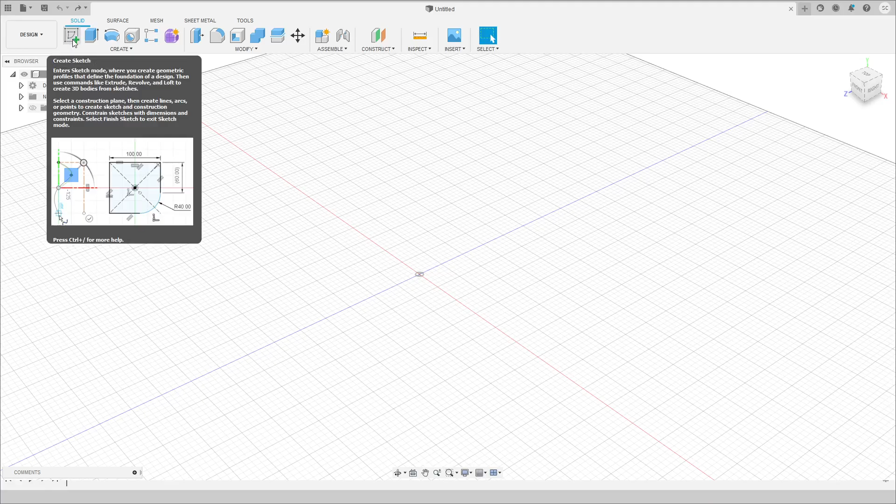So, you may have noticed in the last video, when we were making sketches, the center diameter circle icon up here. And if you press C, it indeed creates a prompt to make a circle. And over here in the feature options, you can select the different type of circle to make. But the one that we're going to use the most, and you can experiment with some of these on your own, is the one where you click to make the center of the circle, and then you drag and enter a number to indicate its diameter.

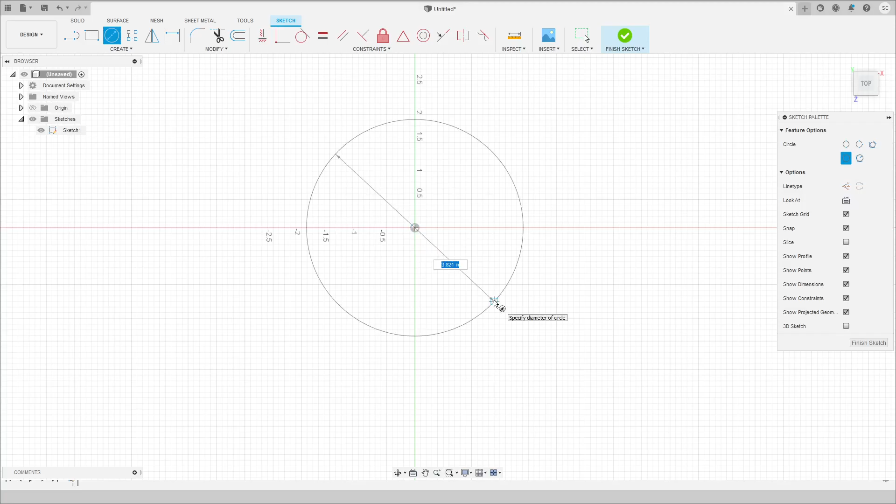So say we make a 3-inch diameter circle, right? Fairly straightforward. Then we can click on this and extrude it. So if we do that, we can make it whatever height we want. And yeah, there we go. I didn't press enter hard enough apparently. And now we have, I guess, like a shortcake looking thing.

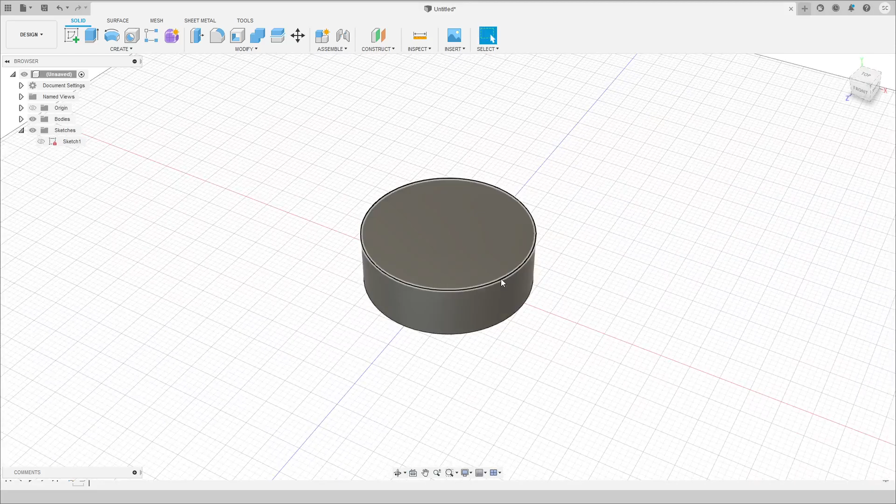Though in reality, I'm not sure what pieces of metal are going to be 3 inches in diameter and 1 inch tall. That's quite a lot of metal, especially in a sort of robotics project, I think. But that is one application of circles that's pretty important. Occasionally, you're going to need circles to make things like this that have flat tops and flat bottoms and round sides.

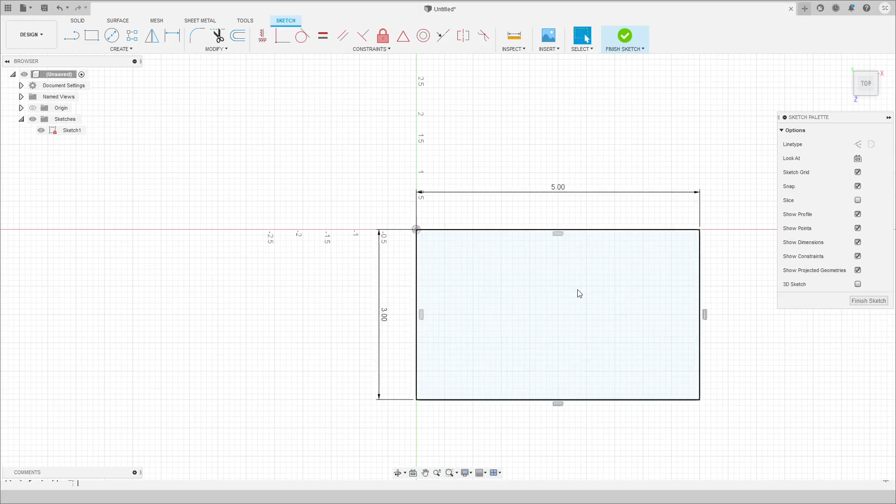But the other application of circles, which is going to be extremely common, especially if you are sketching parts of things, is going to be making basically metal plates with holes in them. So say we extrude this by 0.125 inches. I'm pretty sure that's a standard thickness for plates of metal that you can get. It might be slightly thinner, but not super relevant to demonstrating this idea.

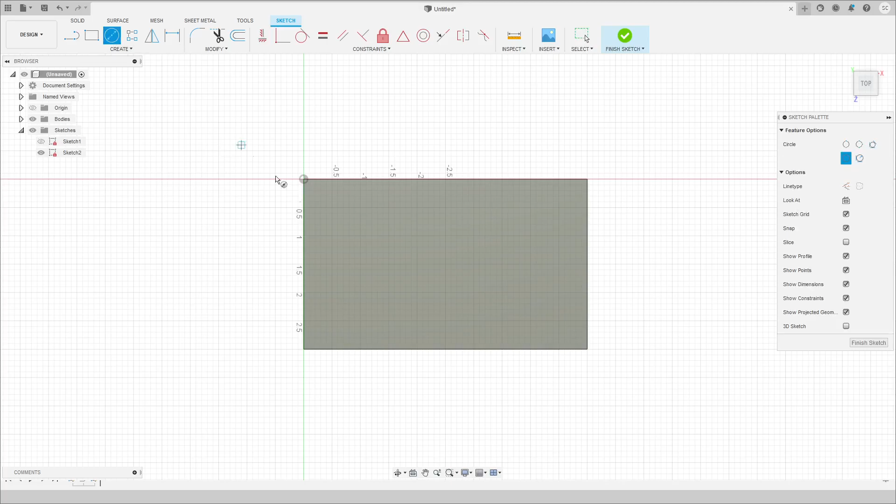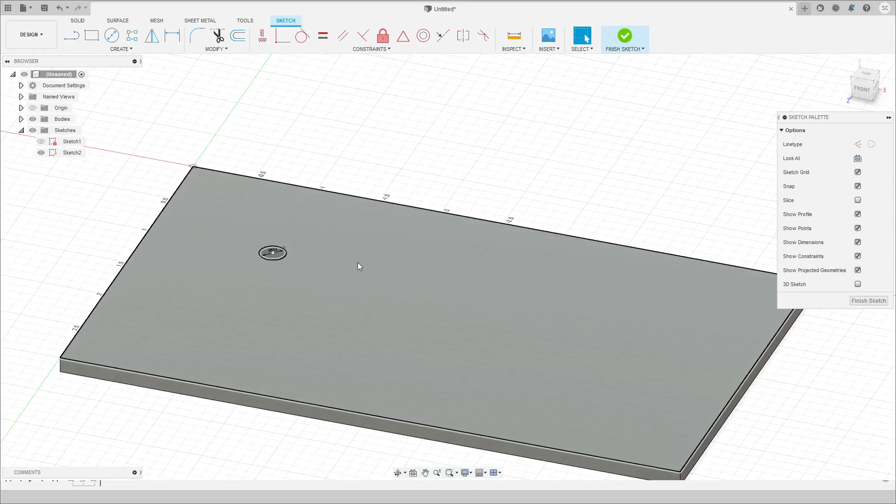So we have our plate of metal, and say we want to make a hole in it to represent a place that a bolt can go through, right? Now, if I remember correctly, one of the standard sizes for bolt holes in plates that I've seen in drawings on AndyMark is about 0.21 inches. So say we make a hole that's 0.21 inches. Great! How do we make this an actual hole in the thing?

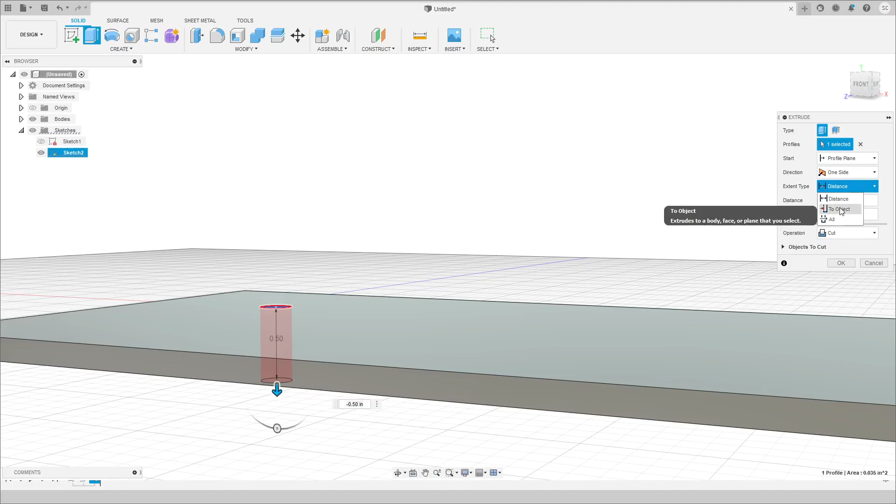Well, if you go to the Solid tab, click Extrude, and, maybe a little unintuitive, you click on the thing you want to extrude, you change Operation to Cut, and then you either drag down sufficiently far, or you change Extent Type to To Object, and you select the plane that this cut is going to go until. In this case, we want it to go all the way through, so we click the underside. And then we can click OK. Amazing. We've just made a single hole.

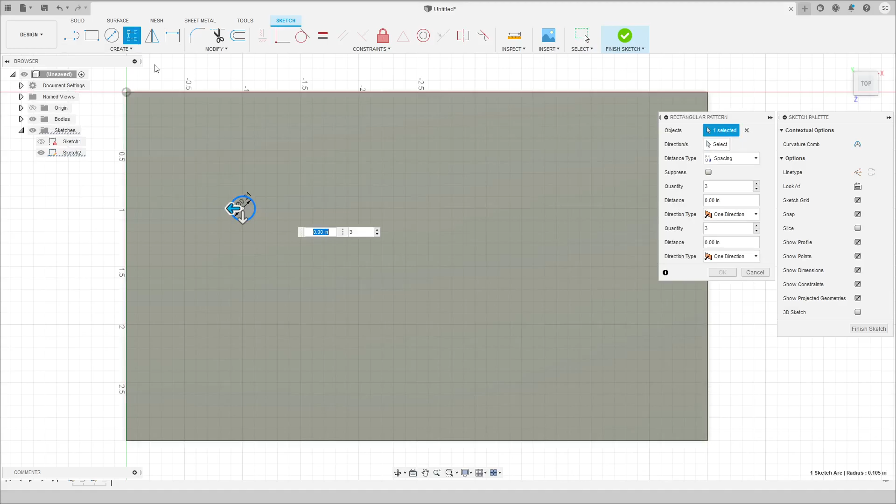Now, typically in plates of metal, you're going to want more than one hole, I think. So here's how you add more of them. If we go back to Edit Sketch number 2, here's something we can do, and it should automatically make a bunch of holes after we edit this sketch. I'm pretty sure, but we're going to see if that's what happens. So here's how you add more.

I just clicked on a thing in the sketch menu, and it's possible this doesn't appear. If it doesn't, type S and then type RECT. Rectangular pattern should come up pretty quickly. I believe the one you want to select is this one, I think.

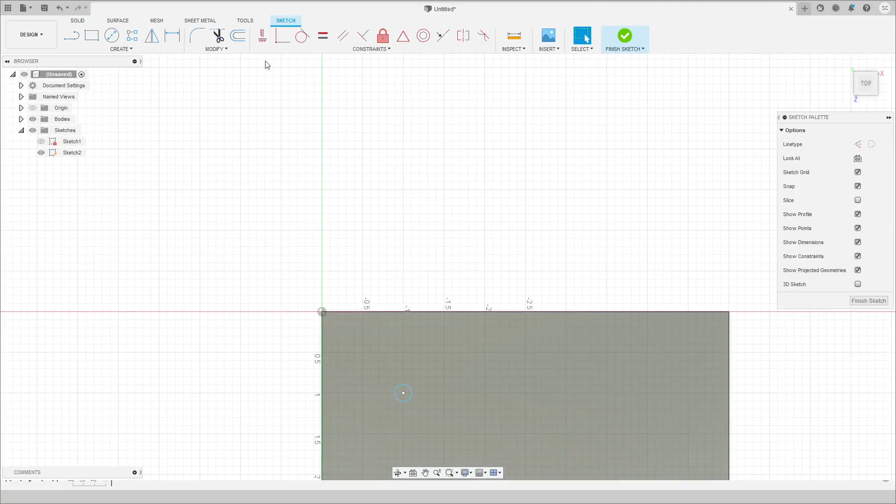No, it's the other one, my bad. So select this, type S, RECT, the one with the non-filled in boxes. Let's just center this so it's a little more visible. And now what you can do is you can drag these arrows to sort of make it obvious that duplicate circles are being made. And then you can start changing numbers on things.

So first, here's one important thing. By default, the distance type should be set to extent. But typically, this is not going to be what you want because often the distances of the holes relative to each other are not going to be from one end all the way to the other. They're going to be between holes. And usually in sketches, if you're CADing something from a sketch, it's going to be implied that all the holes of a certain set are going to be the same distance from each other unless indicated otherwise.

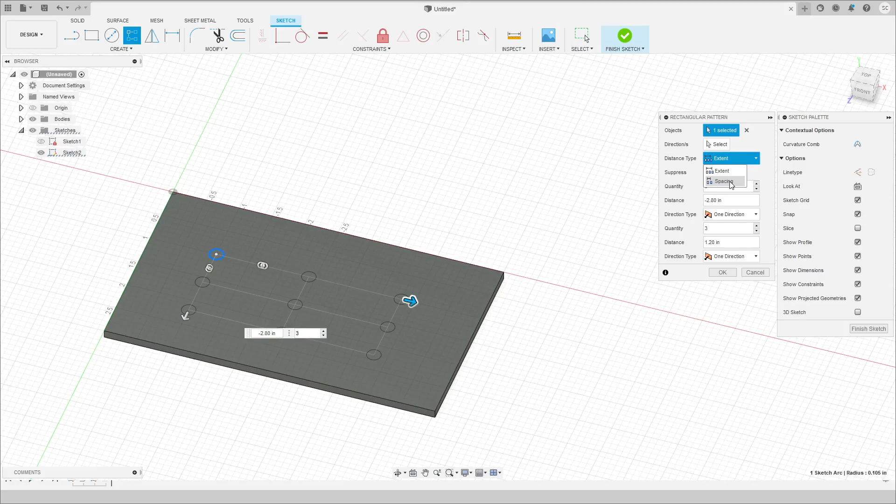So switch distance type. Typically, there may be some exceptions, in which case you should be able to figure out whether or not it's an exception. But in most cases, you're going to want to change it to spacing. And in this case, say that I want to space all of my holes from each other by 1 inch. So we'll do -1 inch for this one, and positive 1 inch, not 0.1 inches, on that one.

Now, here is something that we need to change. By default, it will create a total of 3 holes, the original plus 2 others, and if you decide to go in another direction, it'll basically square that, right? So currently we're set to have 9 holes. However, we want a few more on this side over here, and we don't want as many down here.

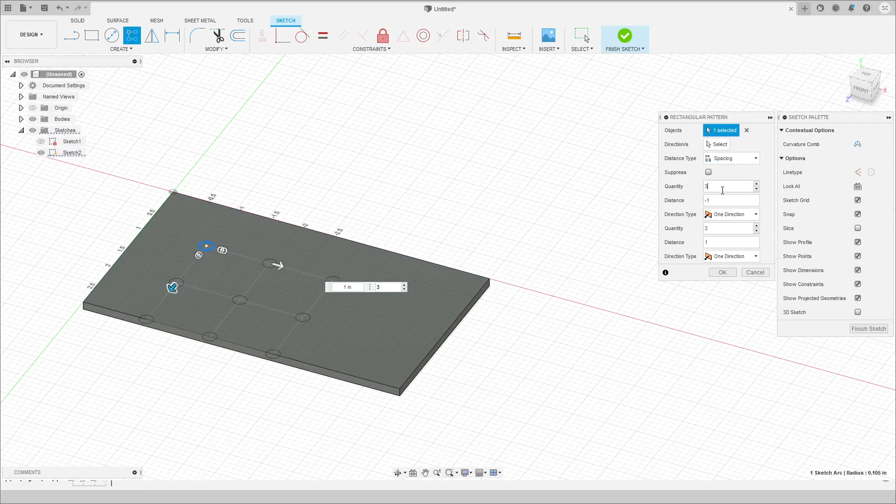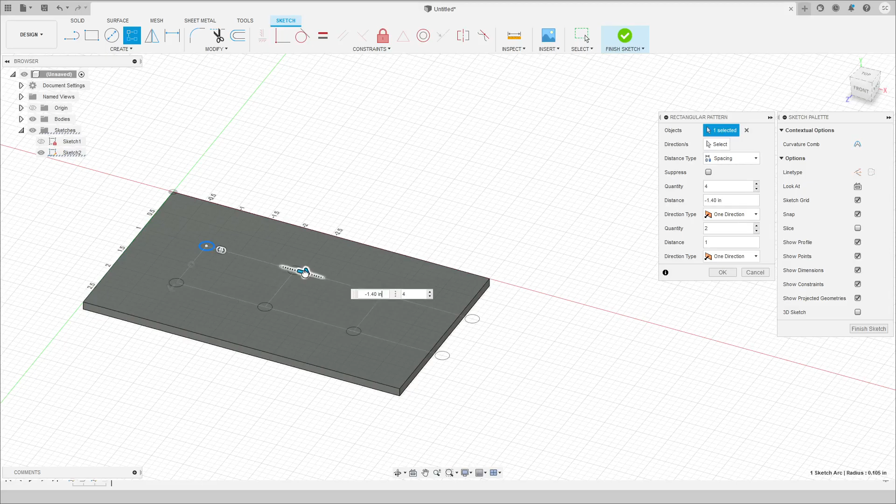So if we click on this arrow, or if we go to here, we can change this number to 2, and it will update it. And if we go up here, we can change this number to 4. I don't think it's very intuitive which one of these corresponds to which axis, so you can just click on the arrow and then adjust the number here if you need to. And then also if you, this is not what we want. But we have created a sufficient number of holes, and hopefully it's clear how we did that.

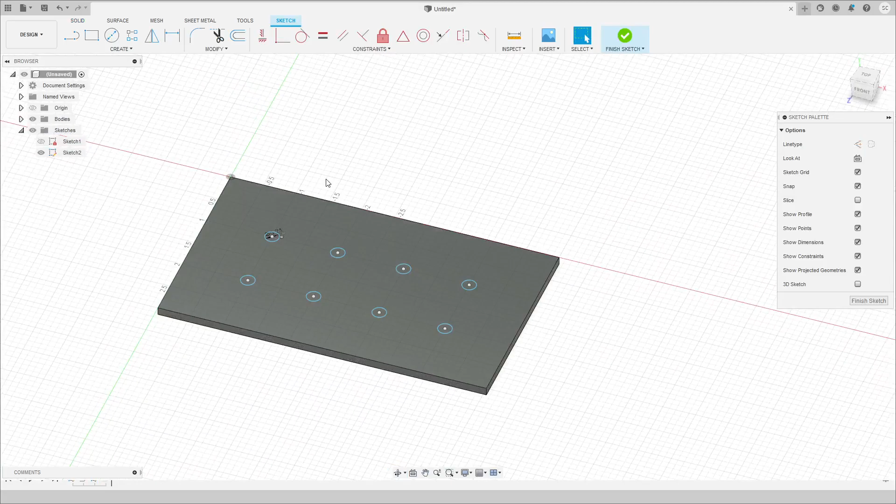So now we click OK, and we finish the sketch. It didn't actually update. Okay, so that's not how that works. So let's go back into this sketch, right? Here's what we can do now. Actually, if we back up, yeah, this is probably fine. Okay. We really should have undone the extrusion earlier, but this should be fine. So now we can select all these holes. We can hit extrude. Oh, my bad. We have to select all of these retroactively. We can select the 7 that we did not extrude yet.

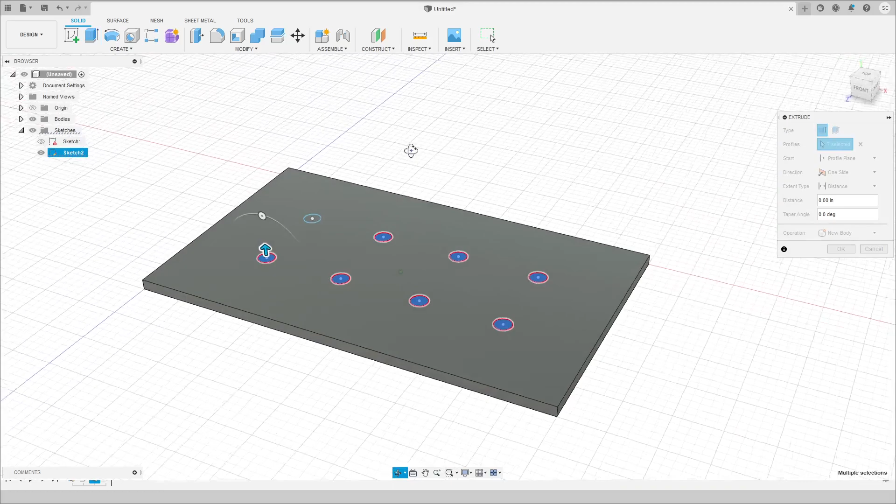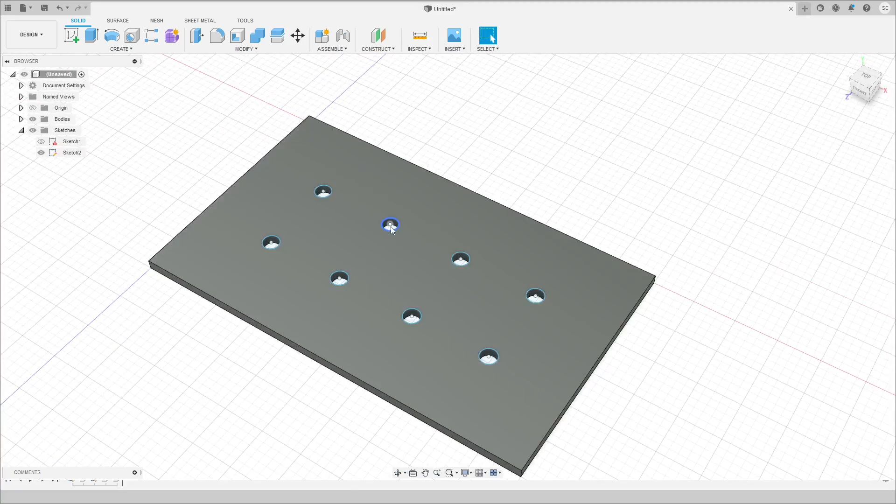And there's probably a faster way to do this. But the important thing here is you change the operation to cut because we want to make holes, right? Then we once again change extent type to object. We select the underside, and then we click OK. And perfect, we have the other 7 holes that we did not have previously, and we're just going to hide this sketch because it looks a little ugly, right? So now we have our plate of metal with a bunch of holes. Amazing. That's how you do that, because when CADing, creating holes is a thing that you're going to do all of the time, and it's really important to be able to do that.

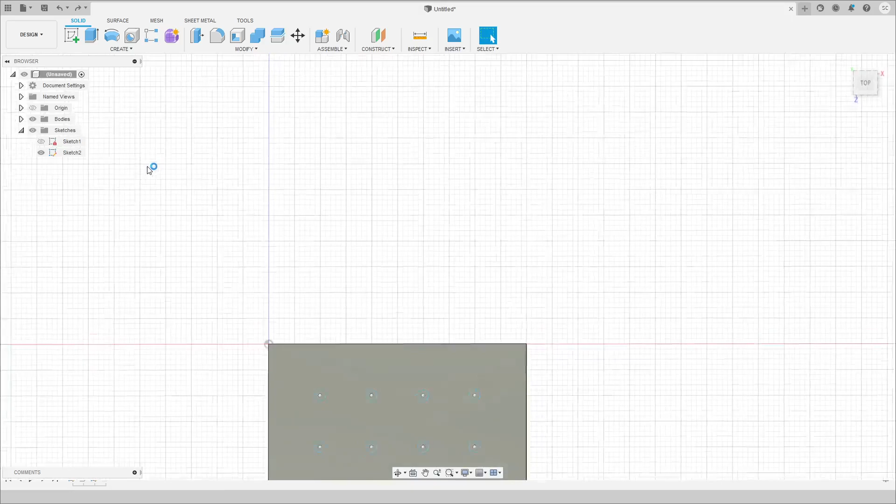Okay, so the second thing that I wanted to discuss in this video, which is the latter part of this video's title, is the idea of having spheres and other figures rotated around an axis of rotation, right? So say we create a sketch in the base plane again, and we create another circle. Let's just say it's 3 inches in diameter. And then we draw a line down the center. And by the way, what I did here is I selected the center point of the circle, then I dragged up. You can see the dotted line probably, and I just click the top of the circle.

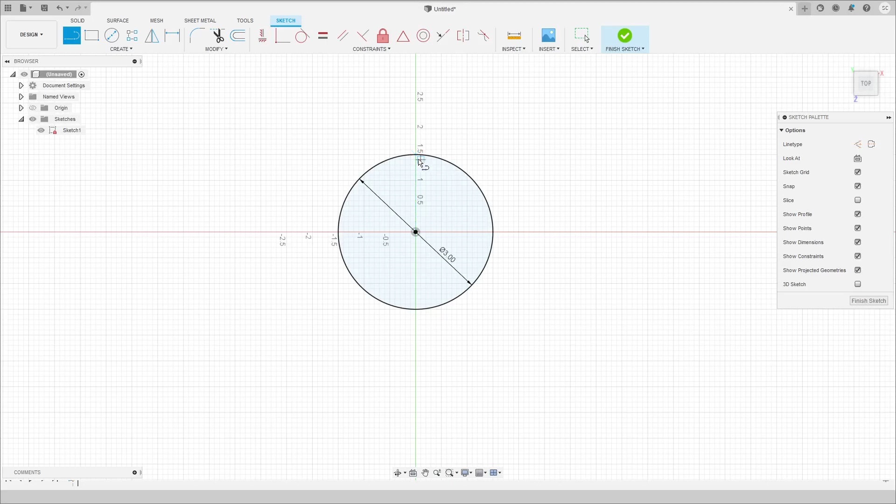And the X indicates, especially if it snaps and it doesn't move very much when you move your mouse around in a small box around it, you know that it's snapped onto the middle point. So we click and we drag all the way down. 3 inches, that makes sense because it's a 3-inch diameter circle. And then we hit escape a couple times, maybe finish sketch.

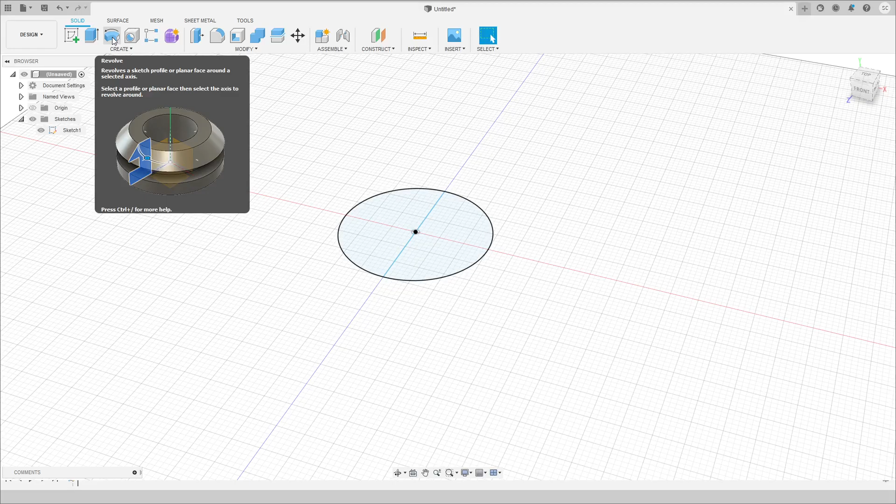Here's what we can do now. Go to the solid tab. Click revolve, click one of the halves, then click axis. You can either click the x-axis, but we made this line, and in a lot of other cases, the figures you make may not necessarily be situated on the origin. So we click the line that we drew, and that's our axis of revolution.

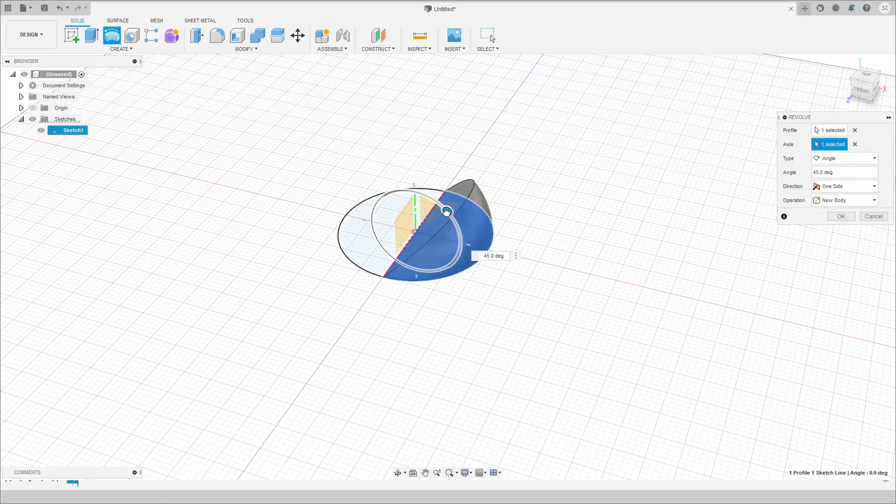It automatically does 360 degrees, though if we wanted to, we could, I guess, make this not a full sphere. But for the purposes here, let's just make this a full sphere. It's a little bit finicky. Let's just make this 360. Okay. And that is a way to make a sphere.

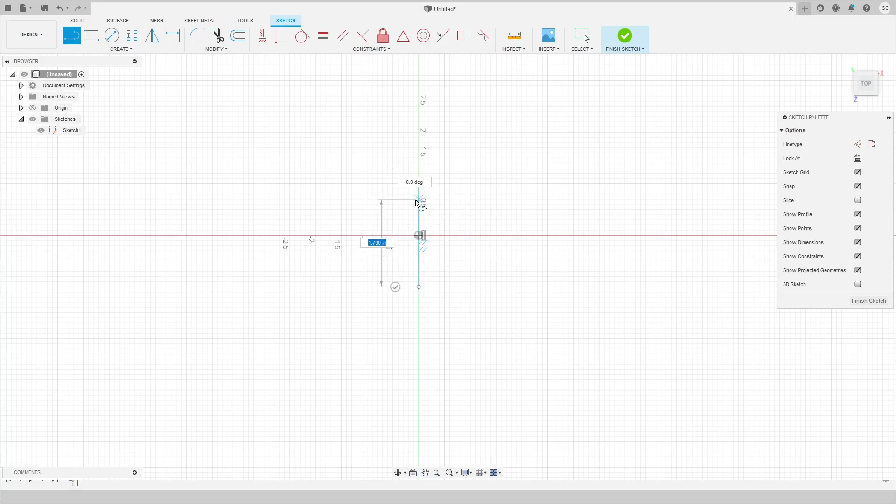Now, we should also touch on other objects that are made via revolution around a central axis. Here, as an example, let's just draw a vertical line here. Doesn't really matter how long it is. And then we put a circle. Say, how about we draw a line that's like 4 inches long, and then we place a circle here that has a 2-inch diameter, right?

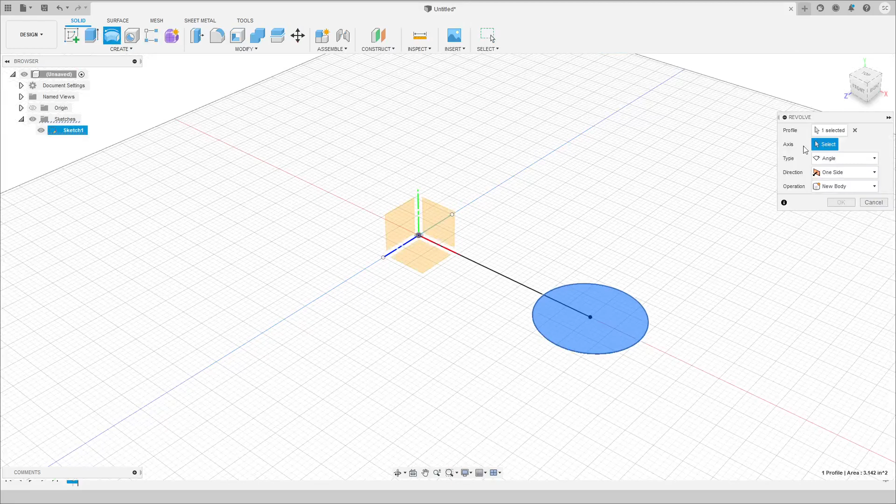Then say we orient this. Yes, this is the down-facing plane. Then we click on this circle. Here's what we can do. Go to Solid tab, click Revolve, select the axis once you've selected the profile, and look at that. We've just created a massive torus.

Torus is huge. Well, I guess it looks kind of huge. It's not really that big. This line is only 4 inches. This isn't any wider than, say, a pool ring, I would guess, maybe a little bit bigger. But that's how you make toruses, among other rotating shapes.

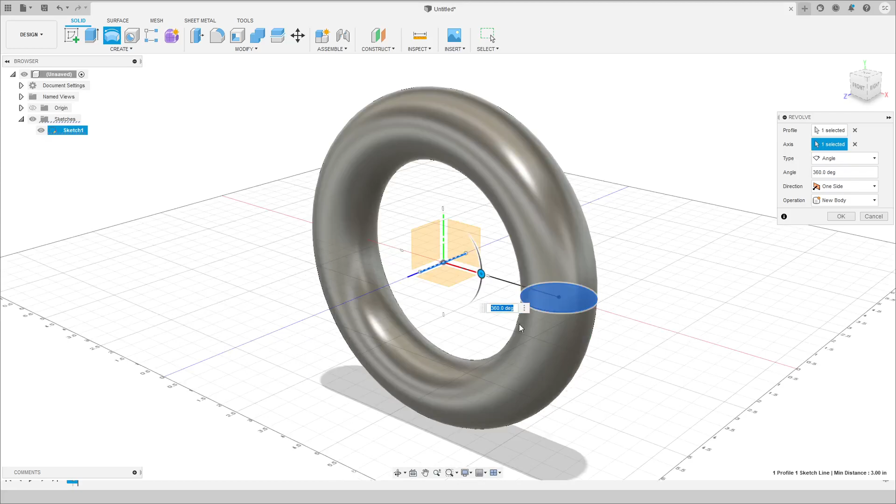And you don't have to use a circle to demonstrate this. We can go back here, and we can create a polygon. Let's just say, I don't know, how do we want to do this? We'll create a hexagon, and we'll click this and rotate it around this axis. And there we go. We have a hexagonal torus.

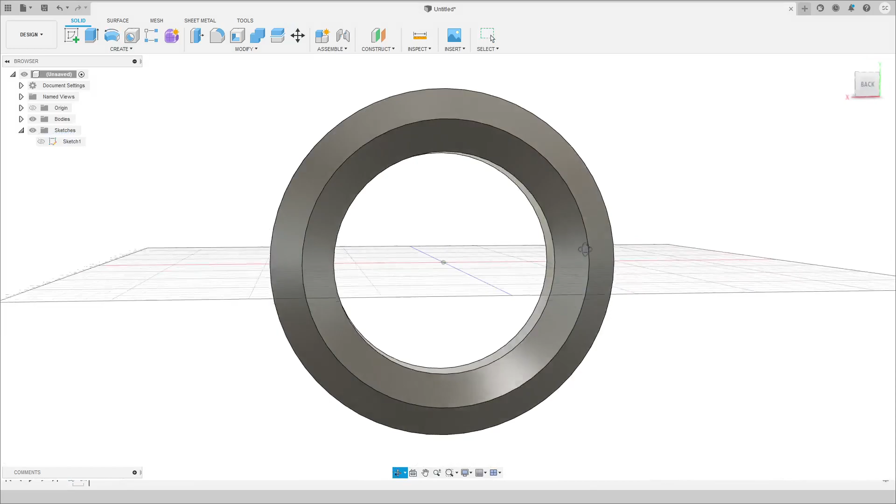But that's how you make tori or toruses. I think it's tori. That would make sense. Kind of like cacti instead of cactuses. But those are all the topics that I wanted to cover in this video.

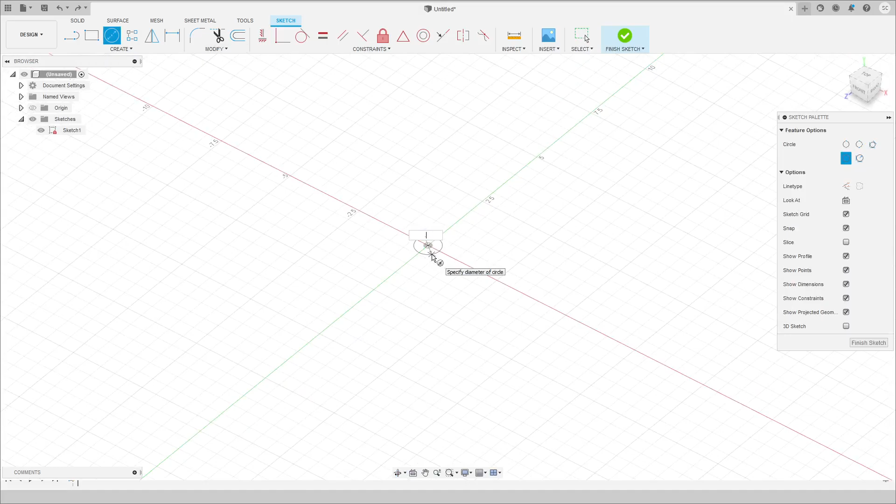So to run through all of those again, we talked about making holes in metal sheets using the rectangular, oops, I didn't mean to click that, the rectangular pattern. So we click on this, we expand, we make sure it's set to spacing, we input the number of, wow, these are really small. We input the number of circles that we want. So like 4 and 2 was in our previous example, and then we can press enter.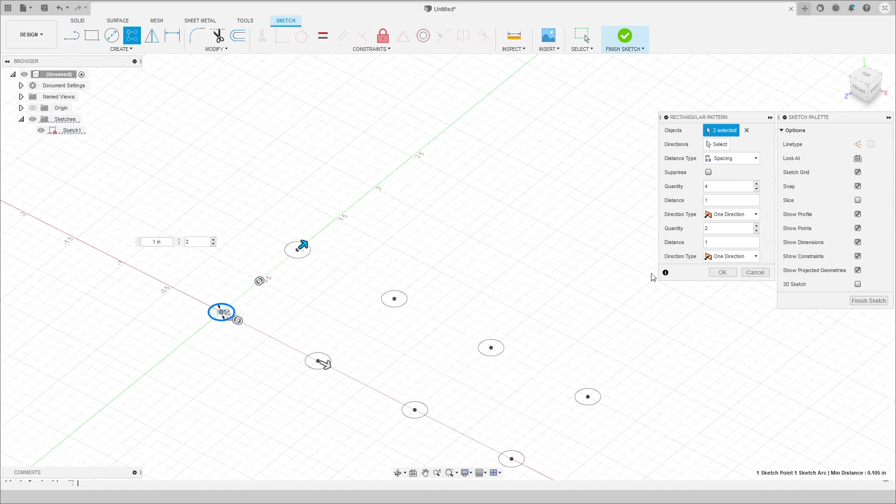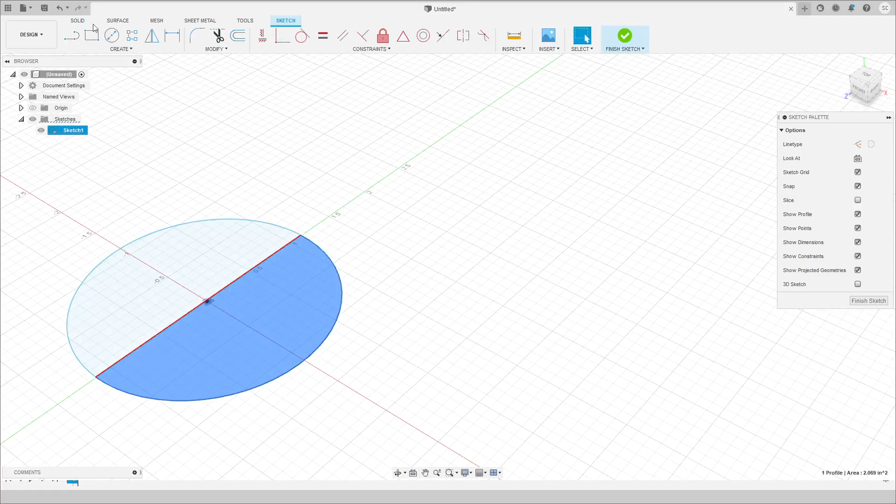My bad, I need to select this actually, and unselect the point in the middle. And then we hit OK, and it creates a bunch of circles that we can use to make a cut in a metal sheet. And then the other thing we did is we created a circle and a torus, and we also had a midline, by which we revolved around the central axis and created a sphere. Let me just create this again for the sake of the demonstration.

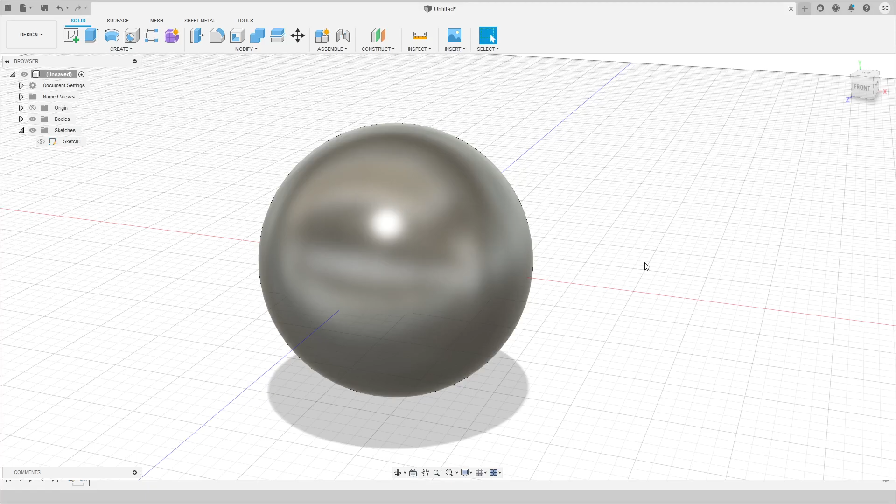That's how you do these things. These are going to be things that come up. I think that putting holes in things is going to come up more often than creating things like spheres or toruses. But creating spheres and toruses can be a sort of entertaining thing to do as well. So that's all I wanted to cover in this video. That is circles, spheres, and toruses.